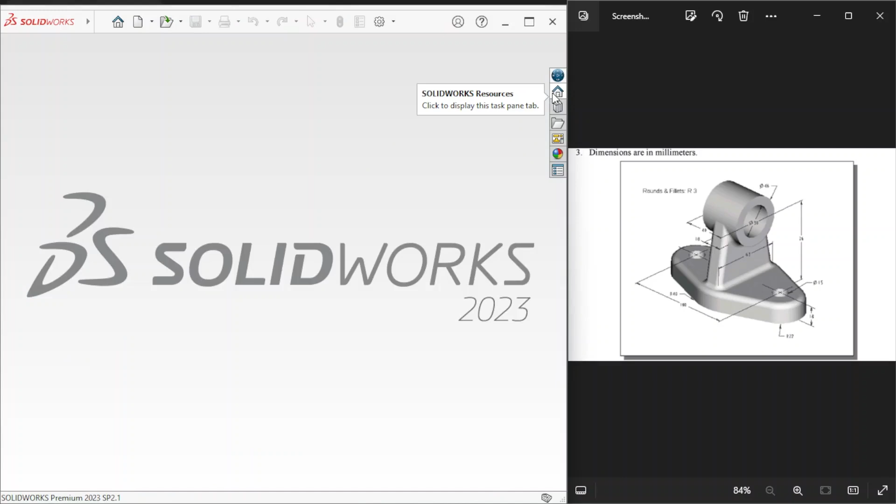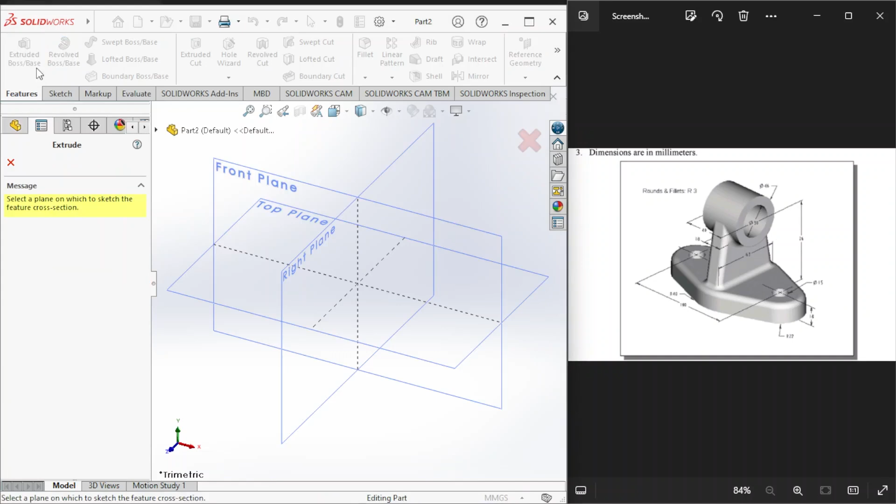The idea here is to start from the base of this bracket and work up until we finish this part. I'm gonna start sketching on this extrude, use extrude boss, and start sketching on the top plane. I'm gonna make a center line.

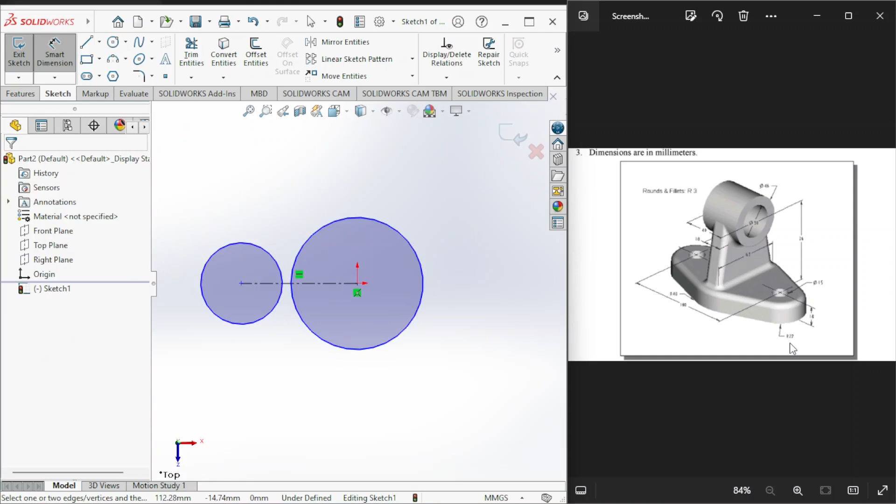I'm gonna make 2 circles. The first circle represents this curve, with a radius of 22 millimeters, so the diameter will be multiplied by 2. The other circle has a radius of 40 millimeters, so its diameter will be 40 times 2. The distance between the first circle and the third circle, which is the same as the first, is 100 millimeters, so the distance between these two circles will be half of 100 millimeters.

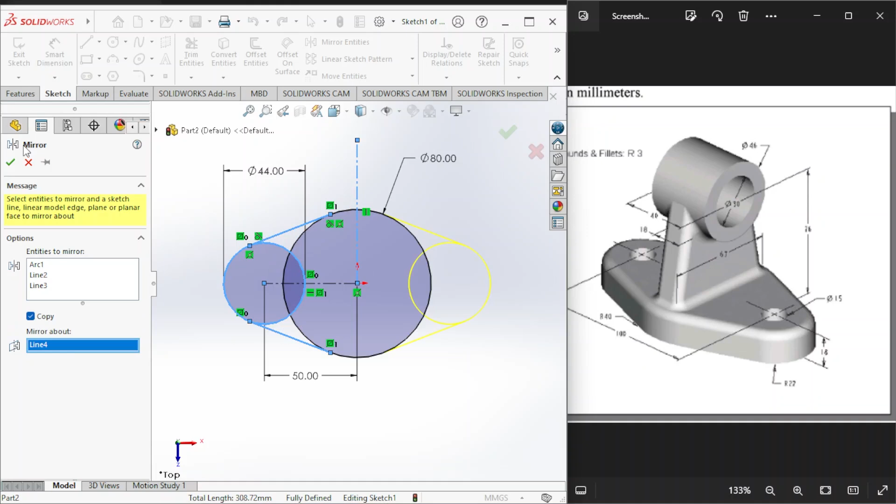I'm gonna make tangent lines and mirror this line about the center line. Then I'll trim, choosing trim to closest, but before trimming I'll make another center line here. I'm gonna mirror this circle and these two lines about this vertical center line, then trim the overlapping curves of those circles.

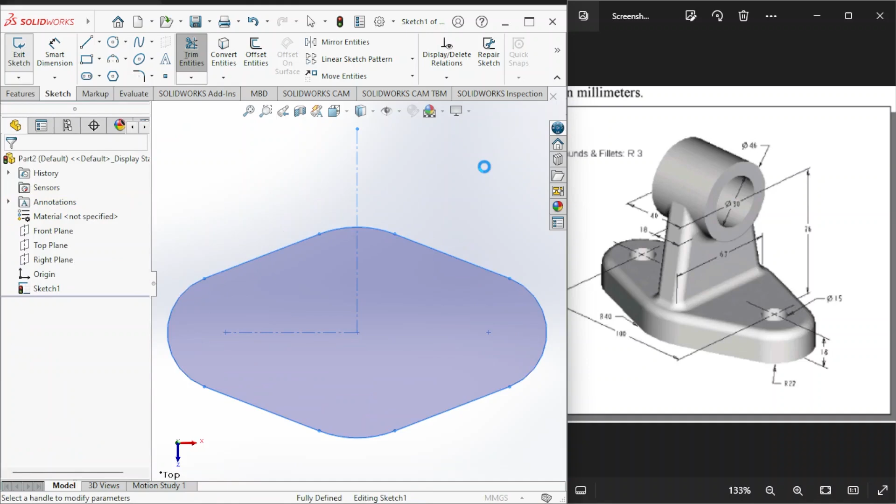Now our base is almost complete. I'm gonna exit the sketch and extrude this base about 14 millimeters, as shown here, and check OK.

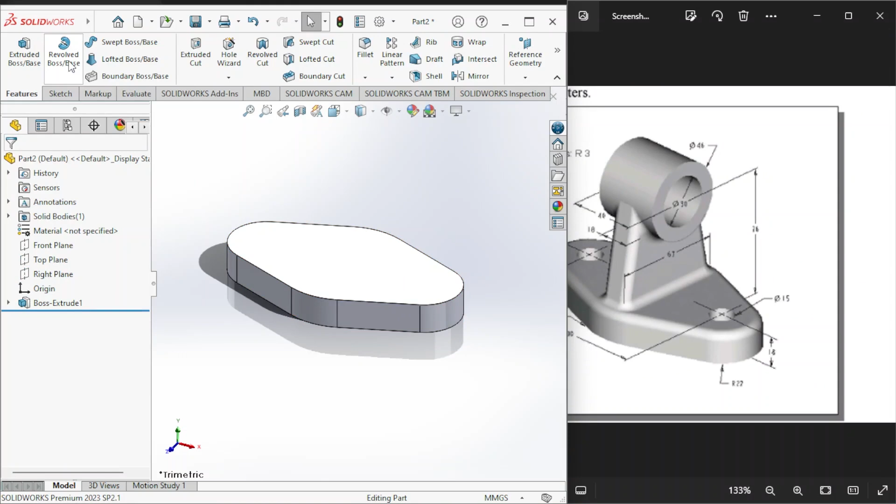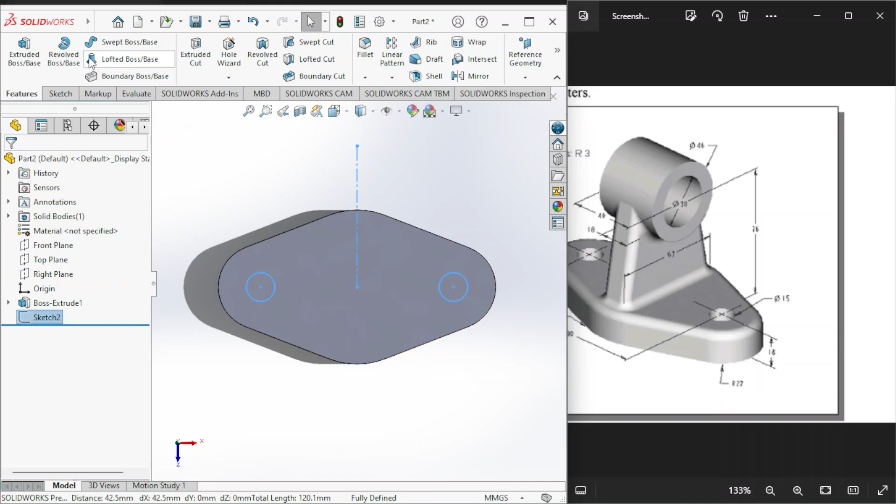Now I'm gonna make these 2 holes for the bolts. I'll start sketching on this base, choose a circle, and the diameter of this hole is 15 millimeters. I'm gonna mirror this circle, but first make this vertical center line and choose it to mirror about. Now it's ready, I'm gonna go to extruded cut and choose through all.

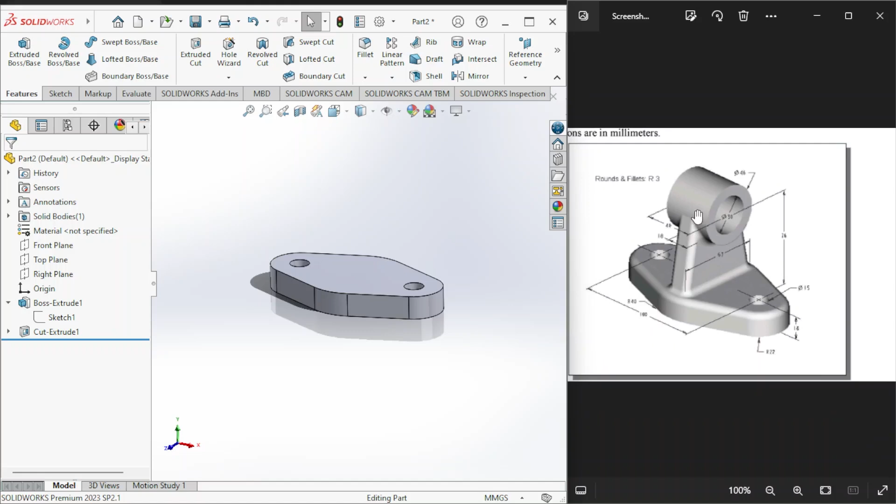So now the base is complete, and now we're gonna make another plane at the center of this base. I'll go to reference geometry and choose plane. The first reference will be the right plane, and the distance is gonna be 0. Now we have a plane to sketch on.

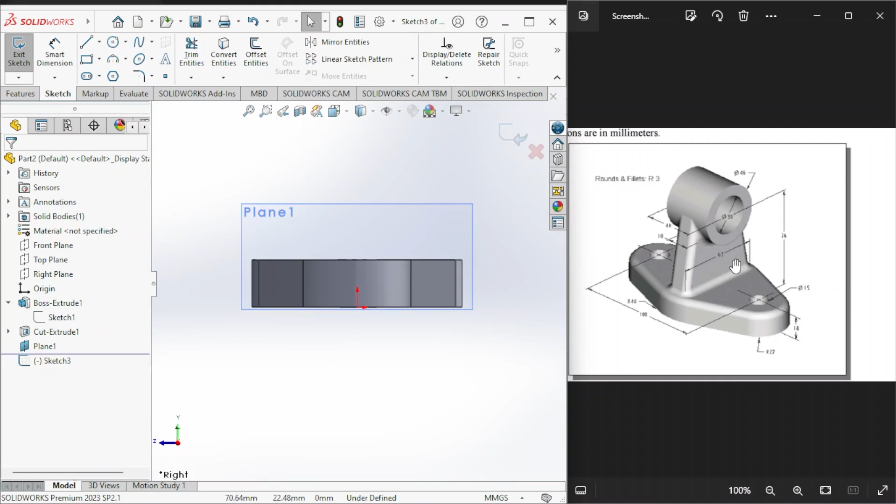Now I'm gonna make this line, which is 67 millimeters. I'll give it a dimension of 67 millimeters, and add a point here so that I can make a relation between the line and the point. This relation will be coincident.

Now I'm gonna make another center line starting from the ground up until we reach this distance, which is 76. Now we can draw the two circles, the inner one and the outer one. The inner circle will be 26 millimeters, the outer circle will be 46 millimeters.

I'm gonna make two lines that are tangent. Now we can see this icon that indicates this relation is tangent. If I delete this relation and try to move this line away from the outer circle, and if I want to add the relation between this circle and this line, I can do it using this tangent relation.